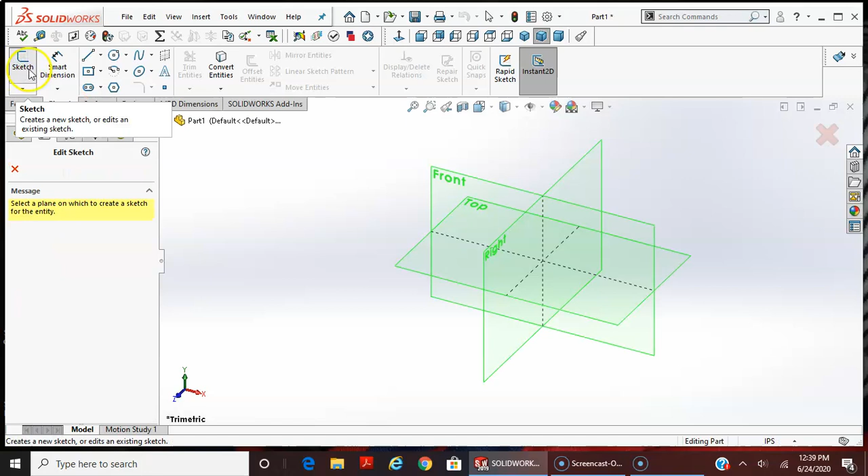Okay, so this one we're doing is the Extrude Exercise 1. I'm going to start a new part. Make sure again I'm in inch pound second. And I always start with a sketch. Sketch tab, sketch icon. The orientation and the origin don't matter. I'll just select front.

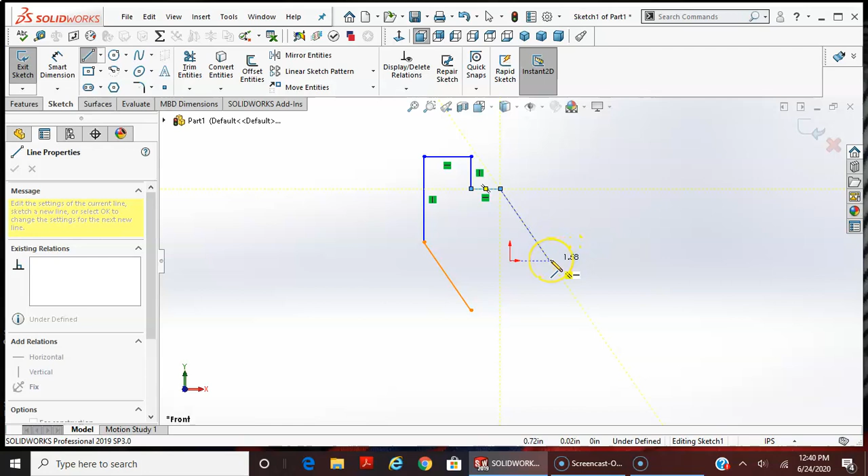And I'm going to use the line function and just sketch. You can see again I can snap to a vertical line. This one will be the angled line. Vertical, horizontal, vertical, horizontal. And then on the inference lines here you can see if you snap this, you can actually snap this parallel to that line, and that is a good thing because I can add that sketch relation

automatically with that feature. You can see here these two lines are parallel, and all I have to do is do a linear distance and an angle for one of these lines, and then based on the other horizontal and vertical dimensions it will constrain this outside line, as you'll see. So I have a good closed contour. It shows shaded area, so it is a closed contour.

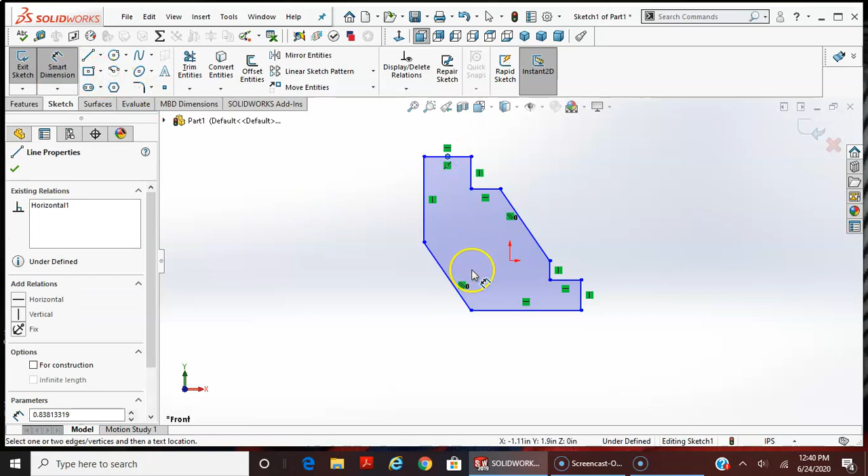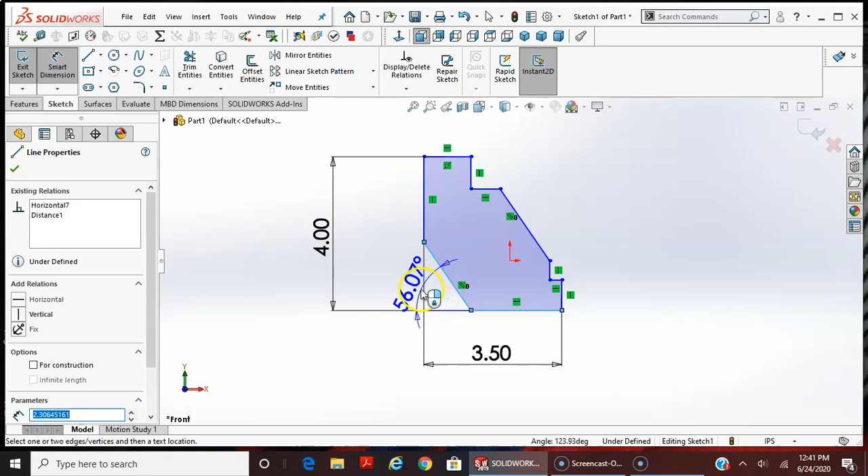I'll immediately go from my line function to my smart dimension. And as mentioned earlier, let's do the overall length first. 4 inches. And from edge to edge, it is 3.5. And then before I go any further, let's dimension this angle. Any line that is not constrained as vertical or horizontal, if I dimension it to a horizontal or vertical line, it will default to an angular value.

This is 45. And it folded over itself a little bit here. I'm not that worried about that. I can move those entities. And then there's also a point. In the dimension tool, there is a point to edge dimension. This will constrain this as a horizontal value. On the drawing, it's 1.5.

And then just to go through some different dimensioning tools, I can dimension line length here. This is 1 inch. And I can also dimension point to edge. On this, it's 1.750. And then I can also dimension, and this is not the best option for this, but I can dimension point to point. And if you do this, it won't necessarily constrain the dimension as vertical or horizontal, as you can see, as I can move this around. But I'll just go ahead and do it.

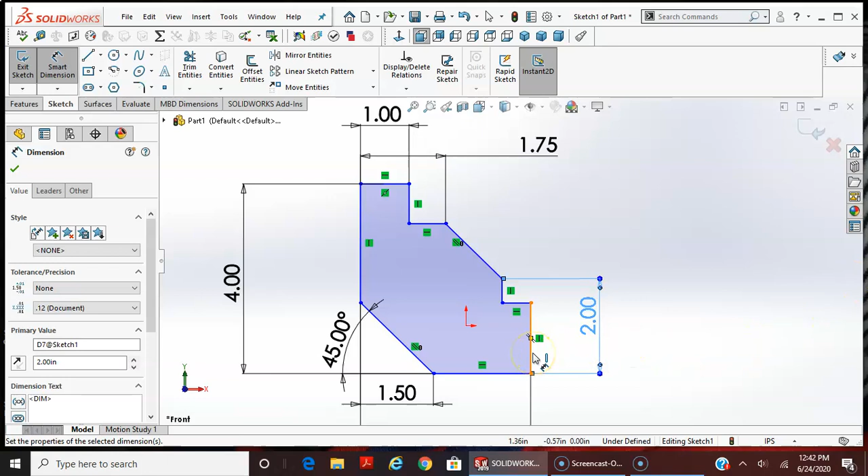If you position the dimension and the extension lines a certain way, then it will dimension correctly. This one would be line length. I can also dimension, like I did before, from a horizontal line to a point. This is 1 inch. This one could be line to line, or sometimes I use the term edge to edge. It's more accurate to say line to line because these are sketch entities. If I dimension off of an extrusion edge or face, that would be more accurate as edge to edge in the terminology.

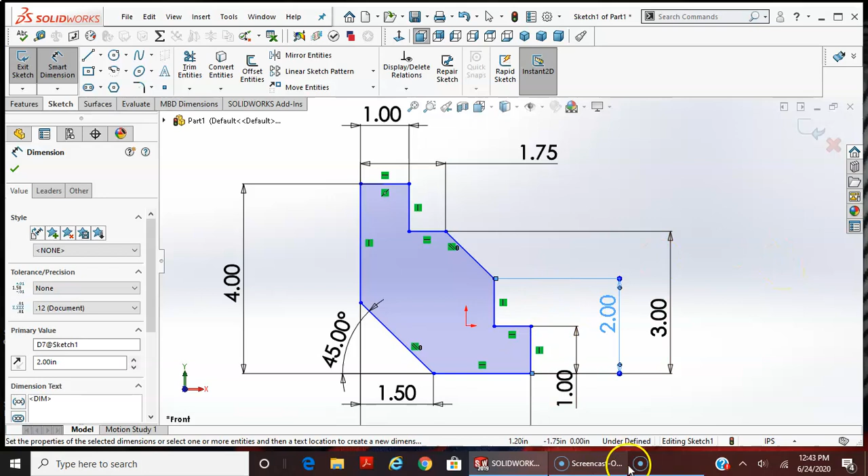This looks pretty good. I'm looking at the dimensions and I think I have everything. Again, this shows underdefined. I can grab this whole thing and move it around. And I just need to constrain this in space. So I'm going to select any point. I'll select this point. Hold Control down with my left hand. Select my part origin. So I have the origin point, and this point is actually where I first started my sketch. I'm going to make these coincident.

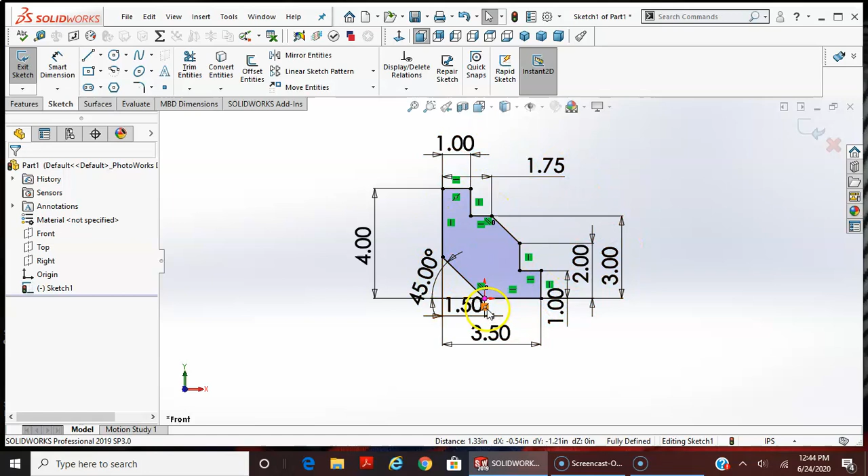I'm going to say yes, and you can see this is fully defined. So 1, 2, 3, 4, 5, 6, 7, 8, 9 dimensions, and then coincident a point on the sketch with the part origin, and I'm good to go. With a fully defined sketch, I'm going to select Features, Extrude, and not a big difference, I think, for this one.

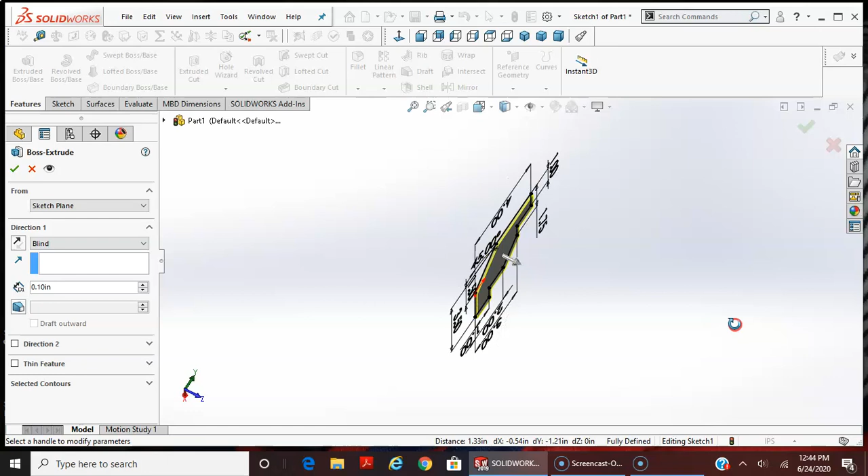I'm going to select the midplane. I think you can get away without using the midplane, but it's a good option to use here. Some of the future ones, it's really key that we use the midplane, so it's a good practice to get into, extruding from the midplane. The overall would be 3 inches, so it would be 1.5 inches both directions. I'm going to say yes.

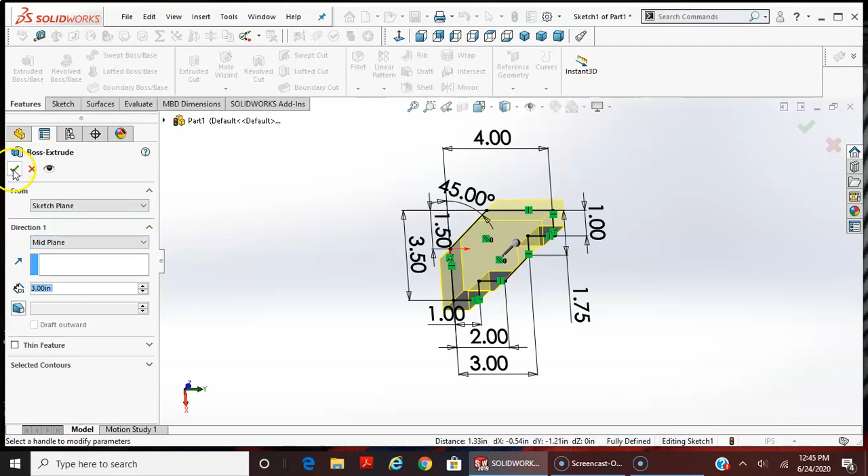The preview looks good. Now, based on the default orientation, if I use the isometric view, it looks pretty good. If I were to save a file, I wouldn't save it like this, or in any weird situation, I would almost always save this in the isometric view. It fits the extrusion to the screen, and I would go ahead and save as on the desktop. It's going to be my last name. You should use your last name. Extrusion options.

Extrude Exercise 1. And then I actually forgot to put my summary information. I'm grading this, so include this on each assignment. Buechler M, and then the title is Extrude Exercise 1. That's all I need for this. I'll go ahead and save it again. It might be hard to see, but I've changed this in the summary information. I haven't saved it, so I'll just go ahead and do a save.

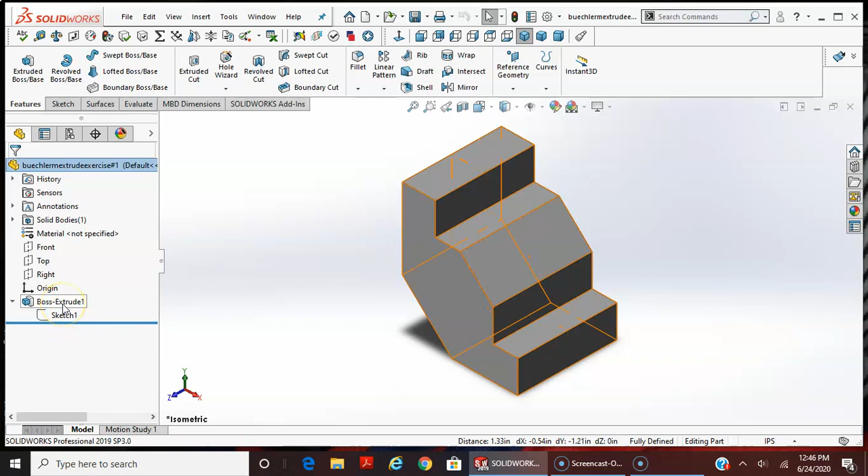Now, in my design tree, I've got my base sketch, extruded midplane 3 inches both directions. So it has my sketch and my extrusion. I'm going to start with a new sketch. Sketch tab, sketch icon on this face. And I'll do it a few different ways. One of the easiest ways, I think, and I don't think the book does this, I'm going to use the center rectangle option, and I'm going to start on the midpoint. So for the middle of my rectangle, I select the midpoint of the line, and it will make this coincident.

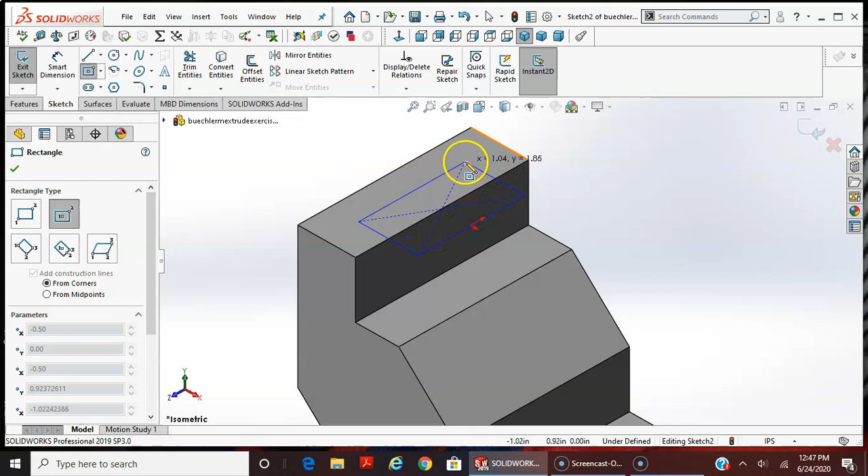I click the center, and then I click out to the end, and then Smart Dimension, this line length. On the drawing, you need to do a little bit of interpretation, but the value between the two through holes is 1.5 inches, and on the right side view of the drawing, near the isometric or pictorial view, it shows a value of 1.25 times 2. So that applies to the slot. So the 1.5 value only applies to one feature, and that's the distance between the two holes.